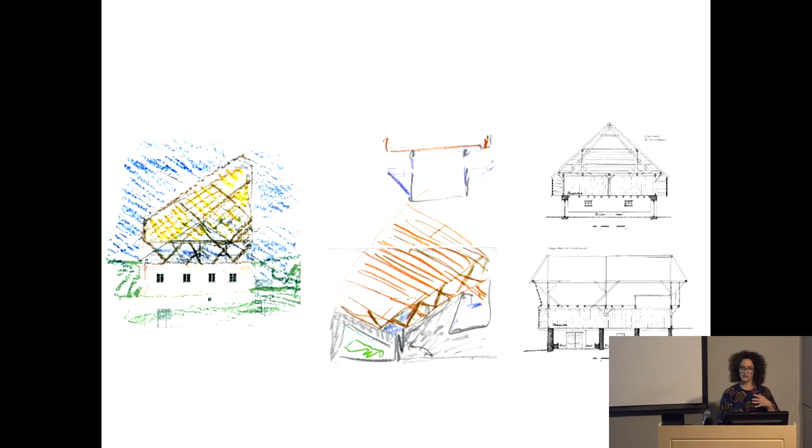We started looking at the vernacular architecture. The vernacular architecture has these big billowing wooden roofs, and generally rock or masonry walls. So we sketched on top of them and thought, okay, we want a timber billowing roof. At the same time, we want to create this connection to the sky through our roof, but we also want to be very grounded.

These are very naive kind of sketches, but this is how we were working, and we built this model in the first few days when we started thinking about the project. We didn't have a plan, a literal architectural plan drawing. We didn't know how the program was going to come together, and sometimes I think this is really helpful for us. You jump into a part of your project and go, that's the building, that's what it's going to be like, but you actually don't have anything resolved whatsoever.

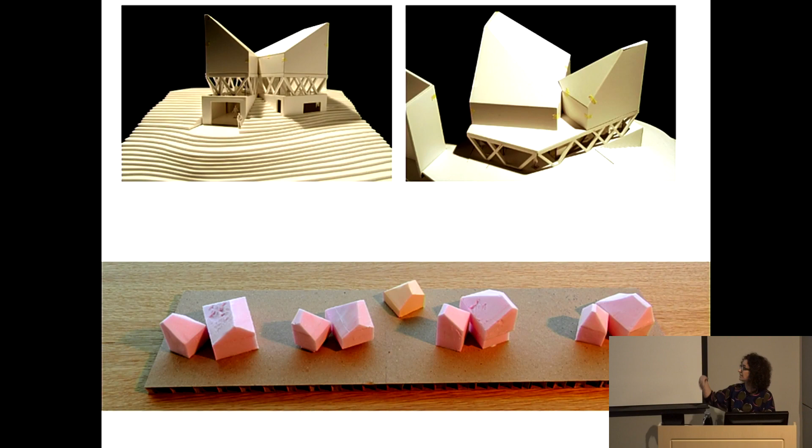And so from there we started working. We work a lot in little models that are just about form making and trying to figure out how these two volumes come together. It's made out of insulation, and you just cut it with a knife and a cutter, and it's really fast. You can make these models in 5 minutes, and then you move on to a larger scale and you mock it up, and then you come up with how this can become a kind of architecture.

So you don't only have your architecture, but you have these mountains. When you're in South Tyrol, you have these mountains, they don't ever leave you. There's a huge presence. So when you're working on a small project, how is it that you're able to be in dialogue with this incredible landscape around you, but at the same time, you're just building a house.

There's this domestic quality to it, and this is something we're often interested in. There's the hillside and then the valley side, and there's always these two different relationships to your topography that create two different scales just because of their relationship to the topography. So you have the smaller scale, and then the bigger scale just because of the topography change. Here you see the house, which is dealing with this idea of the plinth, the datum, the connection to the ground.

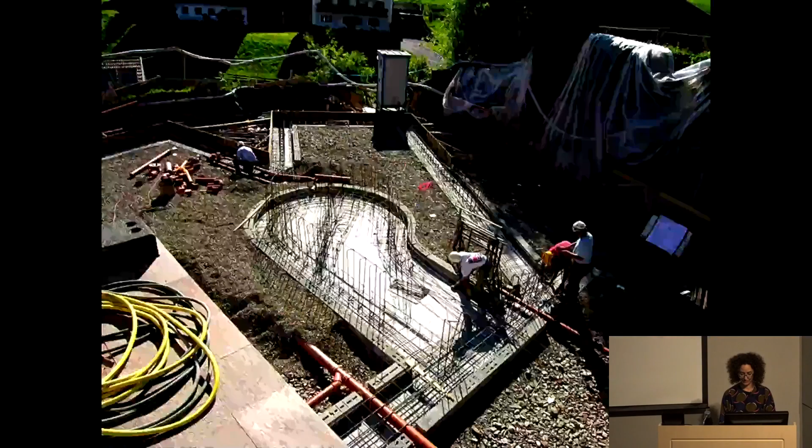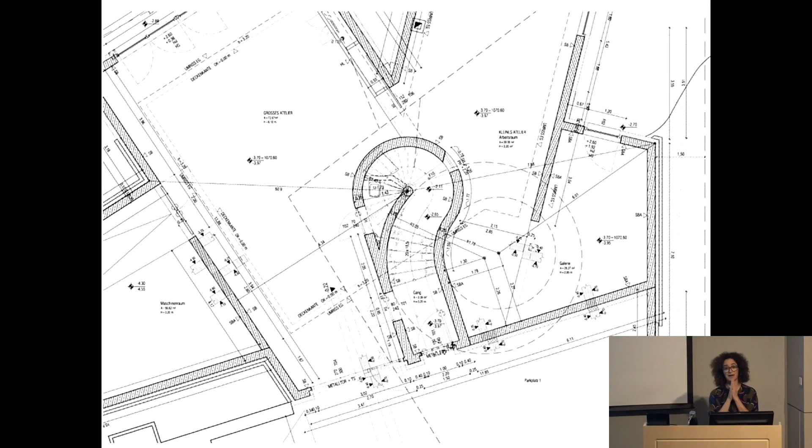We were looking a lot at Kahn's Fisher House, just to see some of that resolution in plan. I'm a plan drawer.

I love drawing plans. So here you see how you come down the ramp. This is the existing house, and you have this stair in the center, and just these two open studio spaces. There's a wood shop, and then there's a mock-up gallery space. And you go up, and the footprint is much smaller.

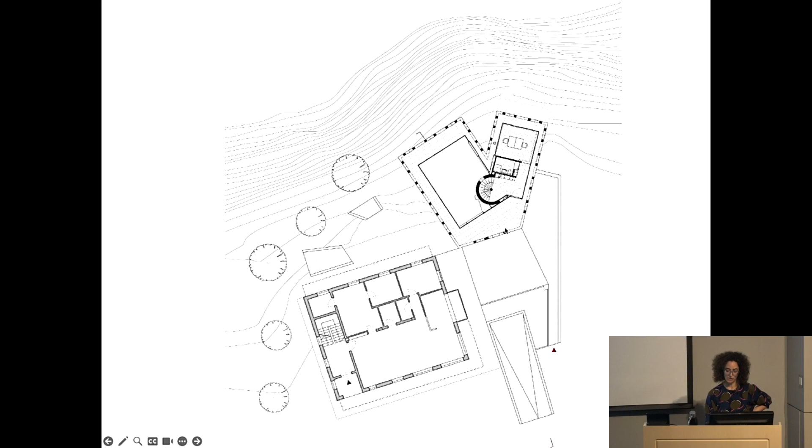When you enter into the house, there's a kind of portico, and you enter into the house here. There's an office, and then you can go up or down. This is a double-height empty space.

As you go up, you end up in the stair, and this is the living level: the living room, their private master bedroom and bath, and then there's the kitchen.

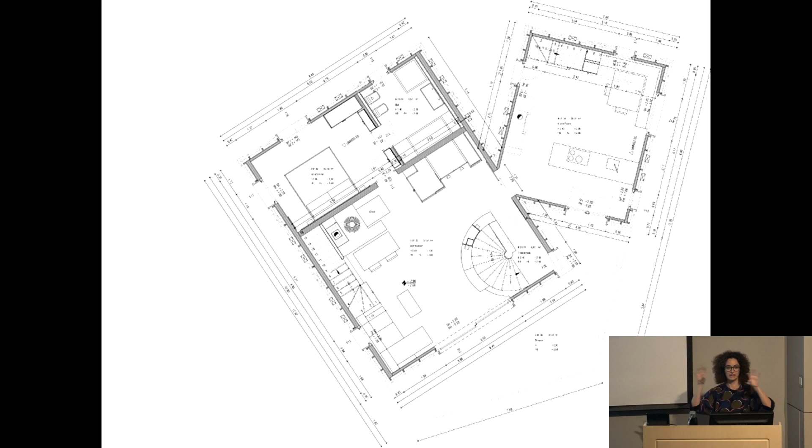What you see here, there's one stair, and then there's another stair. What's interesting about this house is it's not that big, but when you go upstairs, you can't communicate to each other because you're in two separate volumes. You have to go down the stairs to get there.

We were saying this is actually a really big topic in architecture, and it's something you can be a little playful with, gestural about what structure is, where you're not quite sure where it sits. So we had all these conversations with him about it, but structurally, this house is held up by the V timber elements.

So if you take a chainsaw around this house, it's just going to collapse. This kind of fragility of the house was something he was very anxious about, but he was also very interested in how wood can be fragile, and how it would take just a few cuts for his whole house to fall down.

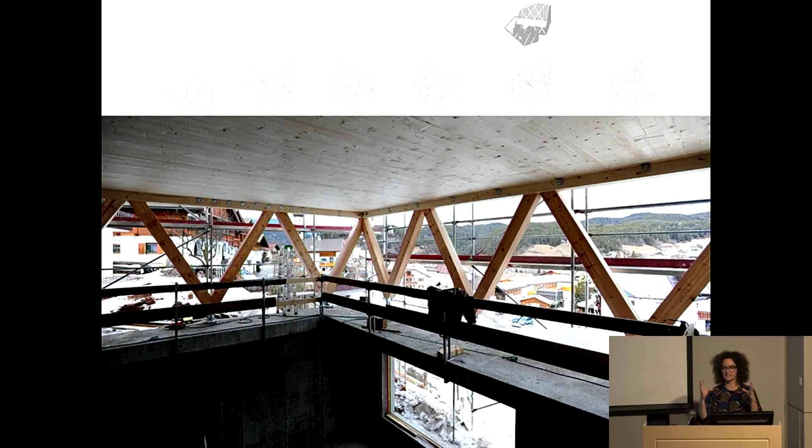And this idea of a house that you had to take care of, that had to react to these mountains around it in this kind of microclimate. We'll see a little further that this material, wood, was kind of something to be reckoned with.

So you see him here on the right. He followed obsessively the construction site. So you see the CLT, the walls coming in, the main beams, and we're going up into the bedroom now.

And you see here how we started cladding it, and the structure is pulled up into the facade, giving a kind of texture, breaking up the facade in different ways.

So these are the feet of the building. They're all pre-cut, and they have these feet that separate it from the concrete. This is a really important detail, because otherwise the water starts creeping up into the wood, and that creates all kinds of problems.

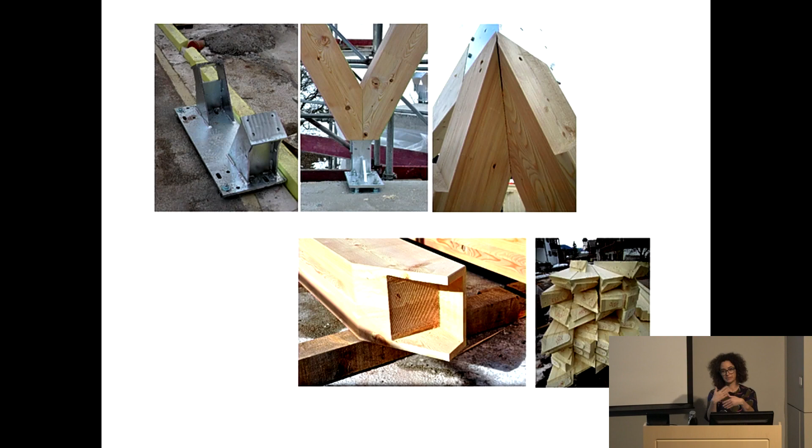And there's a problem here with this V, so water is going to collect at that point and sit there, and you don't want water to sit on wood. You always want it to be able to dry out and breathe, making sure water isn't still on it.

So we didn't think about that, but he wanted to make sure that his wood was untreated and that this building was going to get old as he got old. That was something he was very explicit about.

So a lot of these images you see are from when it's all brand new and shiny. We'll see some images later as we go on. Here we're looking down, into that porch area.

We're looking down into his north-facing studio space. There's a kind of peristyle, a walk all the way around this house, and you can just fall off. There's no hand railing. So he had kids and he put gates up, but he didn't put a handrail all the way around this house. So the idea is this house is kind of on the edge, not quite up to code, let's say.

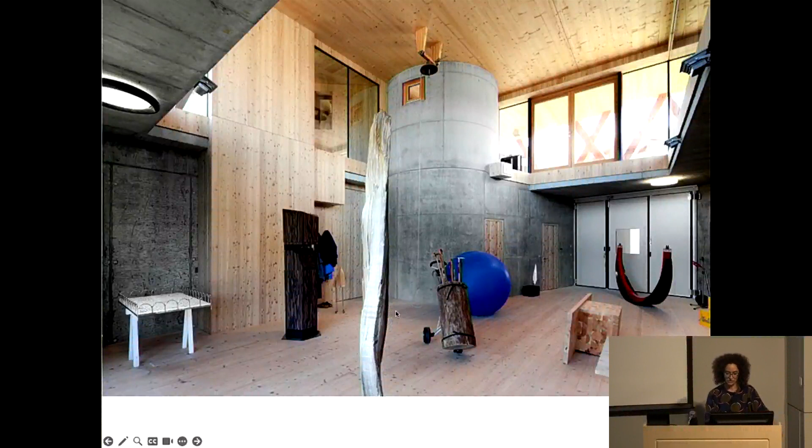There's this idea that you're at one side of the house and you look through this forest of columns to the other side, and it creates an incredible sense of openness. Your house seems much bigger because from one point you're looking through indoor, outdoor, indoor, which was something we were always talking about. You're indoor looking outdoor, you can see people walking around, and you can see into other spaces.

Here you see that central core of the concrete stair, an enveloping space, all concrete, and you come up and it's very clear: this is where the concrete stops and this is where my wooden structure begins. Everything about this house, the points where we had to have a few metal structural elements, we revealed them rather than mask them. That was really important in this discussion of where material's honesty is and what it is that they're doing.

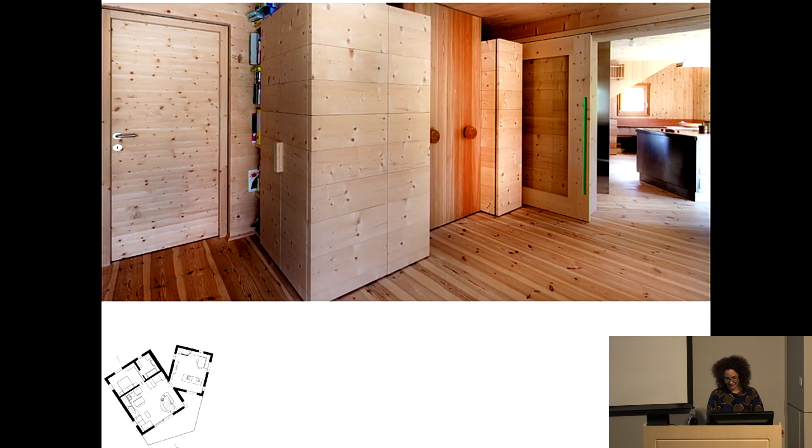All the lights are kind of etched in, the guts of the house. They have a way in which they're embedded within the wood. So really rethinking all of the electrical and mechanical systems of the house. All of the furniture, we designed all of the furniture.

It's all industry grade wood, more or less. Different ways that you look at the grain, the different textures, the handles on these furniture pieces, having kind of fun that you pull the fabric around as if it's behind these metal elements. Here were a few images of the spaces.

Then there's this one thing he drew, which is the shadow that this handrail casts on winter solstice. I thought, oh gosh, it's so poetic. And why did he do it? Because he was paranoid that his house was going to settle and move. The only way he was going to check on it is if the shadow didn't fill in the profile.

So then here we're up into the bedroom. You're on one side or the other, and they're not communicating. You'd be in this space here or on the other side, and you're in two separate volumes. He even tattooed the plan on the facade.

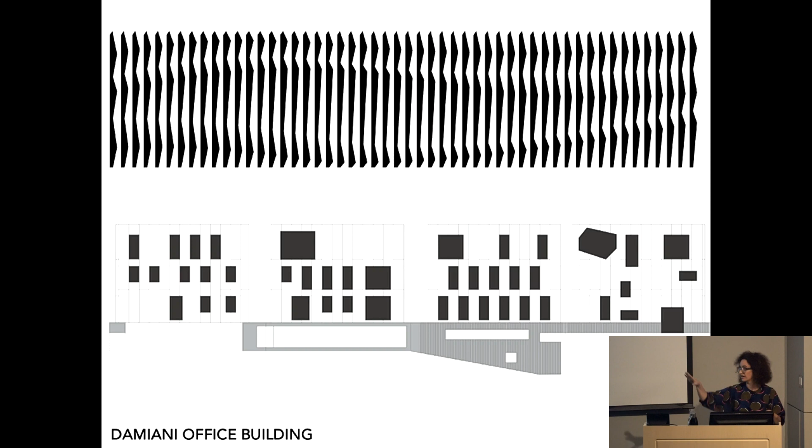And then at the top you're going to get to the showroom. In that showroom, we're going to put the sandwich in plexi, and you're going to see the stratification of the different kinds of wood, vertical and horizontal systems. So we thought, okay, that's interesting. What would happen if the facade rethinks the way you can think of a wood building, working with these singular elements - this is the unfolded facade, and then on top are these kind of brise-soleil elements. This house is located in Bressanone, in the light industrial area.

It's smack in the middle here, kind of a really ugly context along the river. And we said, okay, let's work with a wooden cube that has a kind of bark to it, like tree bark, with a kind of thickness to it. That thickness was just as irregular and rough - a lot of times when we were starting out working with wood, the buildings tended to have a kind of flatness to it, and so we're trying to push back on that flatness of wood.

And working with something along the street facade that was kind of enigmatic. It was like this wooden box that sat in among the stockpile yard of all the wood. And of course, you have that base in concrete, because wood doesn't like to touch the ground. It's a real problem, a very difficult kind of detail to resolve.

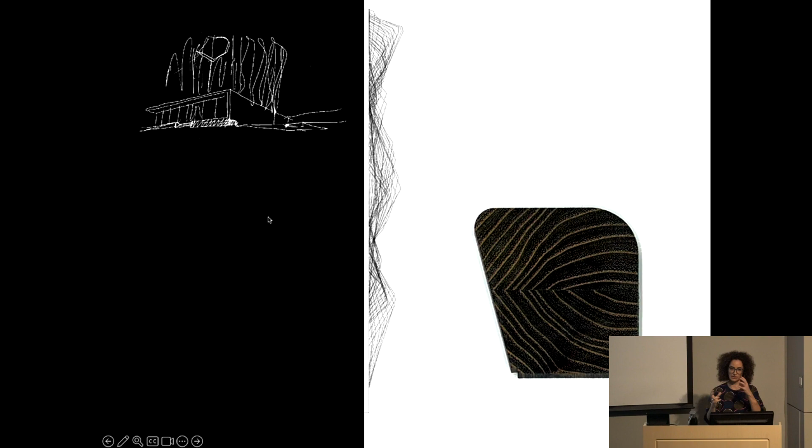So we were thinking, yeah, we want to work with this facade that kind of expresses the veins of wood, the kind of life that's ingrained within it. And this is just a cutoff of one of the handrails that we were working on. So we're kind of working back and forth in scales.

We were thinking about how we could have this facade that was closed. Everybody's working on their computers in there, so there's a light issue. So we said, okay, we'll actually have the windows behind these slats of wood and have just very few openings. Depending on where you are, these openings can reveal themselves when you're looking at it frontally, and the wood has a kind of draping effect.

So wood is incredibly malleable. You can do so many different things with it. How can it be solid and have that kind of stereometric quality to it, but also have this draping quality? In terms of its construction, there's a concrete base.

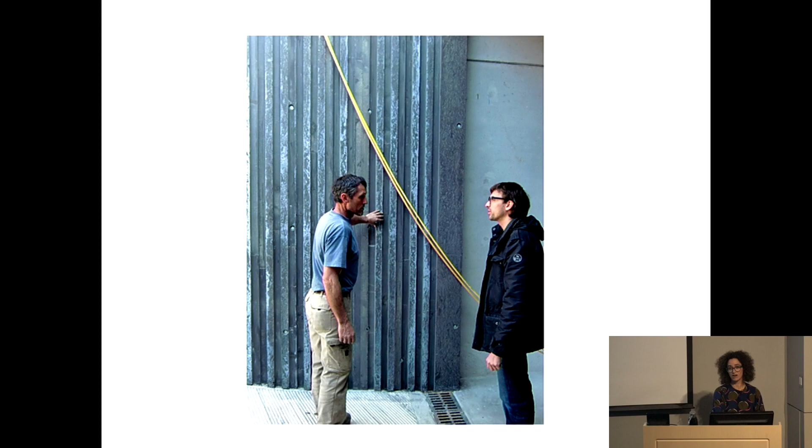We worked with all kinds - concrete can't live without wood. They're two materials, they need each other, and that's actually very beautiful. How can you work with this concrete, give it a kind of memory of its formwork, and come up with all the different ways wood plays a role in the making of concrete? That was also part of what we were looking to do, and that relationship between the wooden slats and the texture of the concrete could work with those two materials together in a very explicit way.

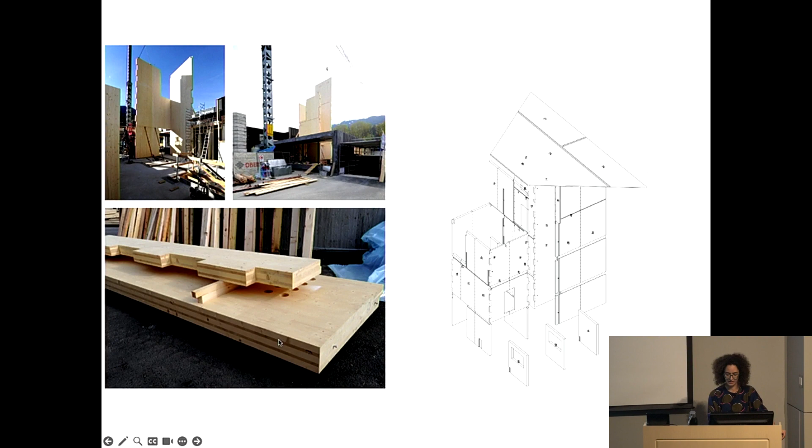The building has two structural cores. One is in the center, the stair and elevator core, and it's CLT, and that came up first. I'm just going to run through a series of images where you see the concrete base, and then the building starts to grow - the structural cores go in first, and then the walls go up: walls, slab, wall, slab, wall, slab.

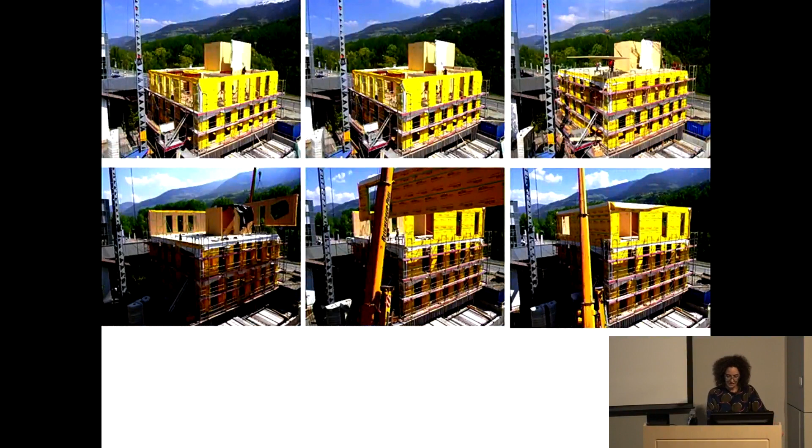And so these aren't beautiful images - these are just from the construction site camera on the crane. You get to see the box building. It's a very generic kind of building. And then they come - the LVL slats.

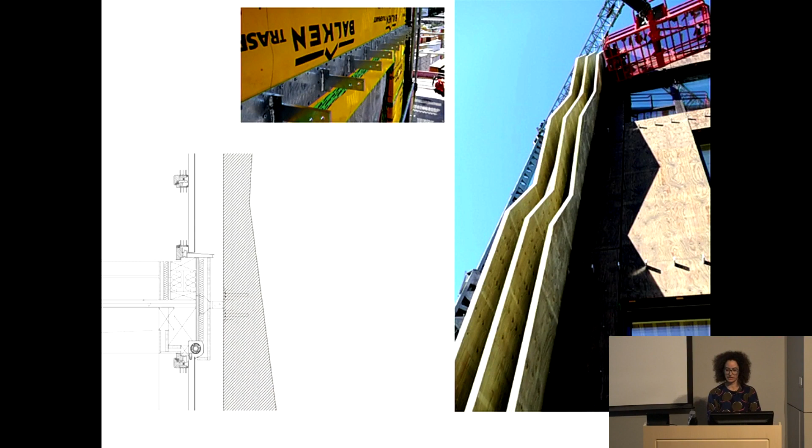I don't know what you'd call them, but they come already with their fasteners. These fasteners have a really simple connection that's already on the facade, so you could mount them really quickly. You see here in this section, this is concrete, and then the concrete stops here. There's a grade change, so you can enter into the concrete base.

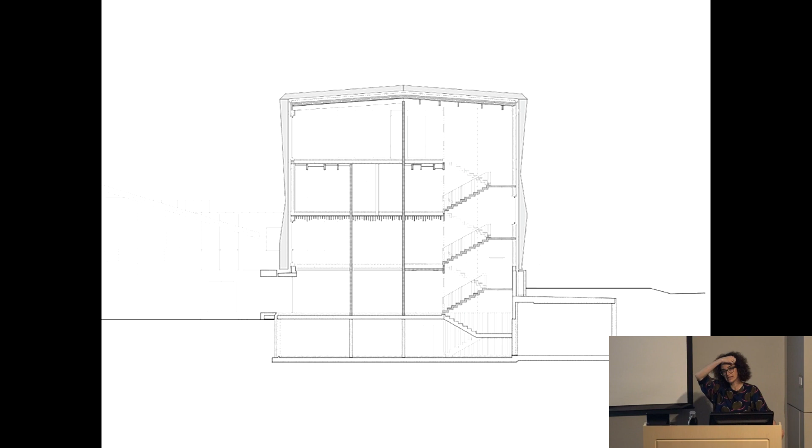And you see that in one of those first images - it's the lower concrete base, and then you're in this world of wood. Each horizontal slab is a different construction system. We won the competition because we said your whole project is a showroom. As you take your customers, your suppliers through the building, you're seeing all the different ways in which wood can become structural or non-structural systems, showing off the versatility of the material.

The wood - this is just a really cheap grade wood that, if you sandblast it, the grain really comes out and gives you this beautiful texture. That was actually a close-up of this wall back here. So as you enter the building, it's not just concrete versus wood, but there's a kind of symbiotic relationship between them.

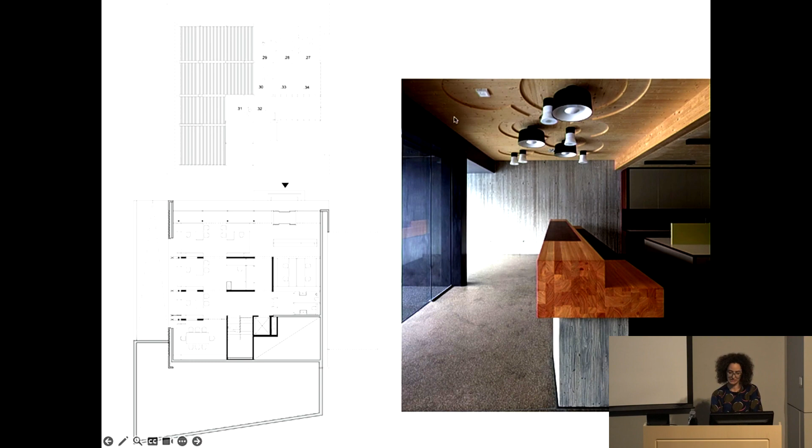So I'm just going to go through a series of images that give you an idea of the different kind of roofscapes we were giving. The amazing thing about this was that they had the production facility next door. They were the gurus on wood, so we didn't know how any of this worked, and they would come up with, say, okay, let's just make our slab. This is them making their slab one by one, just nailing them together, and so then we could test out how to integrate the lighting.

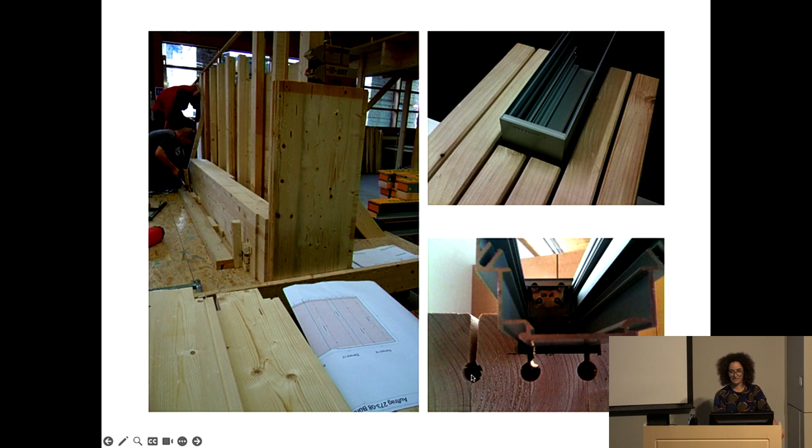And really looking up close, these are acoustic little pockets that give an acoustic property to this floor slab. Again, working with this undulating profile, what's the minimum and maximum profile height of these structural elements, so that it also talks about the structural properties of the wood.

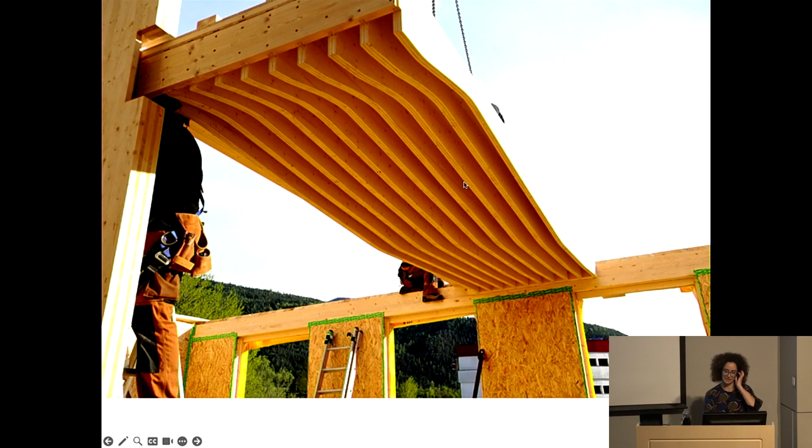So here they're making them so that they're kind of prefabricated, so when they mount them, they're ready to go. So they mount them. This is the size of the piece that's going in, and then this is the effect that happens.

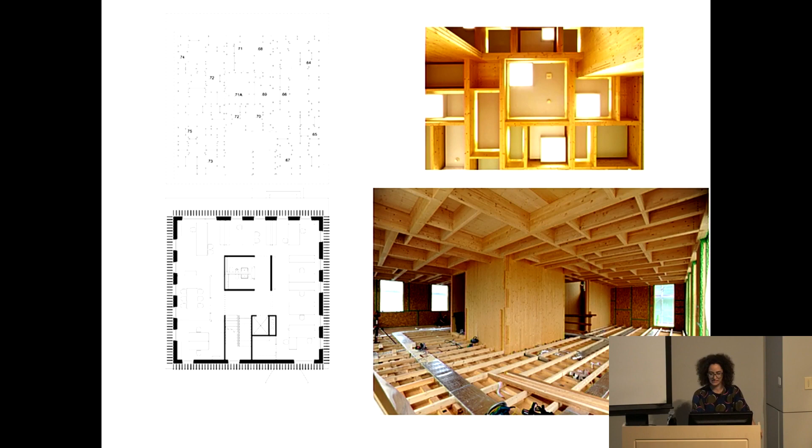So here, I always wanted—at UVA there's a coffered ceiling, and I was like, I want to do a coffered ceiling. These are some of the drawings, and all of the beams that you see here are structural. So it's a coffered ceiling in wood, and all of the mechanical and electrical systems are integrated into that.

And so you see here, this is the lighting, and they have these acoustic panels, and around the acoustic panels is where the air is brought up. So it's all kind of hidden within the logic of the ceiling.

We've gotten to the last floor, which was technically supposed to be the showroom. And so this space all of a sudden became open to possibilities. And this is a space now that's become an art venue.

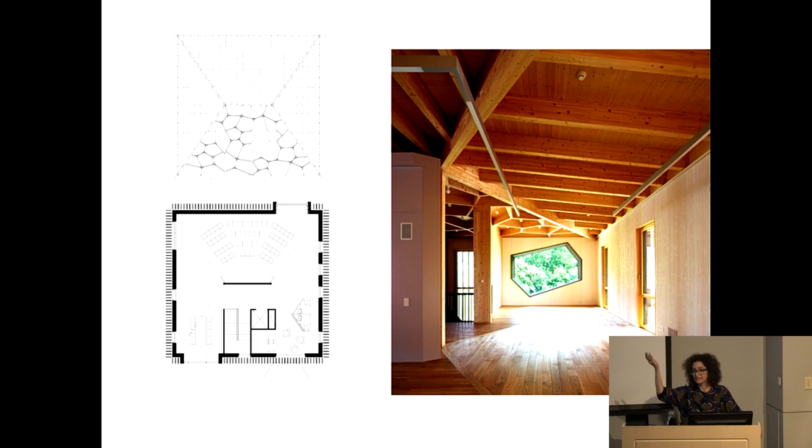They have seminars for people interested in working with wood, but it's actually kind of become a place on the radar for all kinds of cultural activities, so that you have this kind of empty space that is no longer dedicated only to the showroom.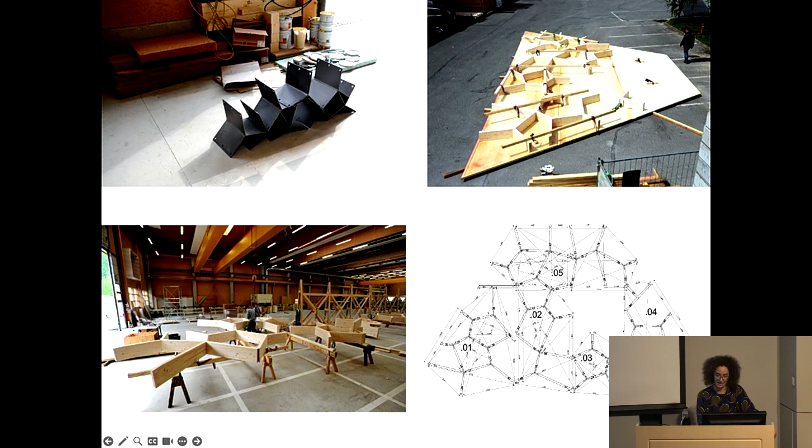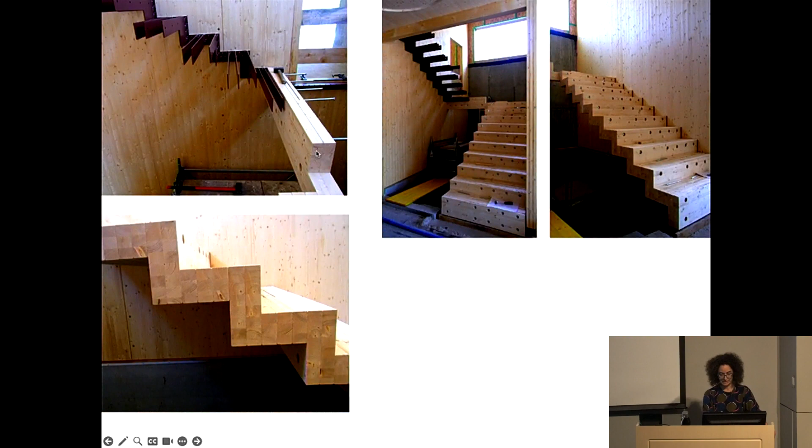This is looking up through the structural core of the stair, and you start to see how the stair was constructed. It's just a series of beams that are cantilevered off of the side of the structural walls with these mechanical fasteners.

But in the end, it's still just part of the stockyard. And this is something that the client to this day really values. People always say, 'Oh, we'll just go to the wood box,' and everybody knows it's the Damiani building—the wood building. So that's how the wood can actually communicate, and if you're working with a material, it can also be a message about what it's containing within it.

In this next project, this is a recent project that we finished. We hadn't used wood in a long time—there's been kind of a roller coaster ride in the use of wood. This is a hotel, in the UNESCO World Heritage Site. This is the first time, and probably the last time, we're going to do a hotel.

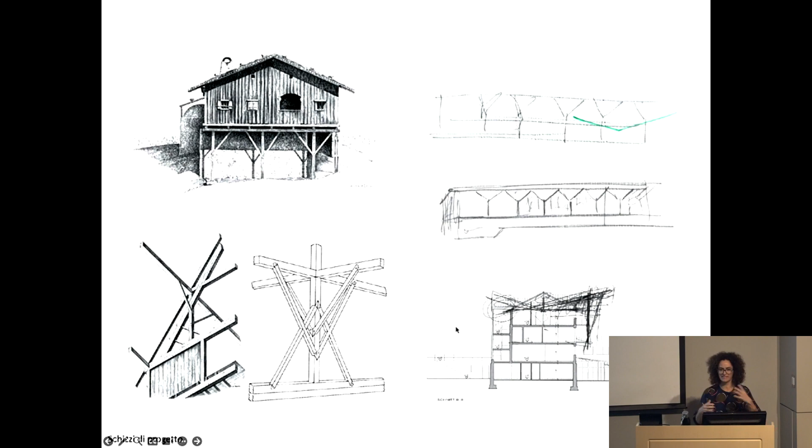In this rough drawing, green is existing concrete, yellow was the existing roof, and this is the new wooden one. All we did was put a new roof on it and make it into an asymmetrical configuration with these big columns holding it all together.

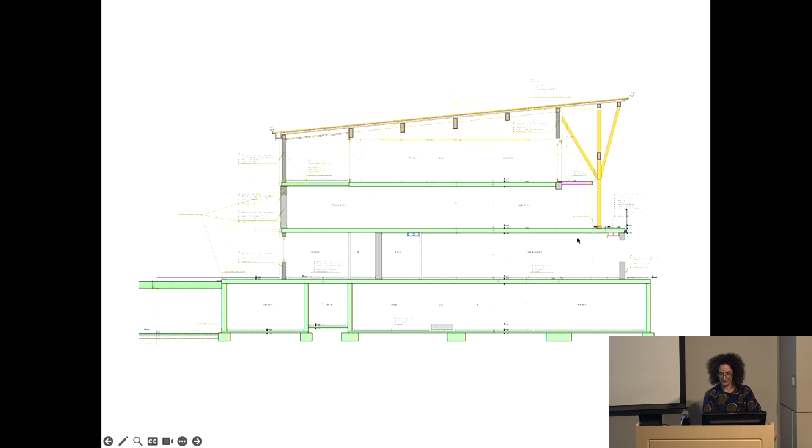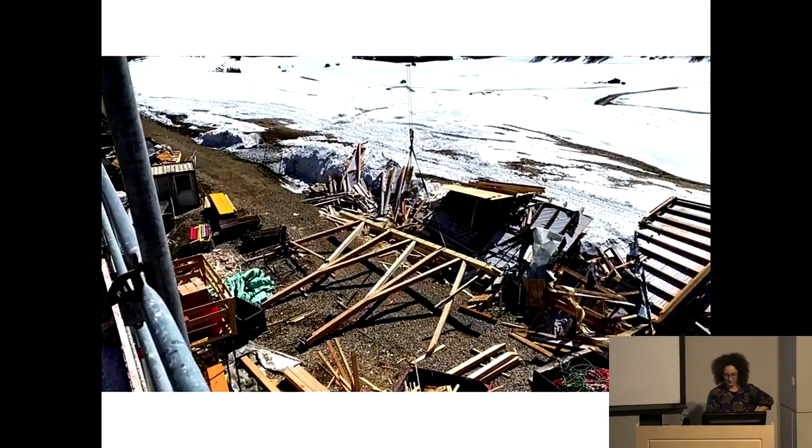This is a shop drawing of the roof, and here you see the construction site. I thought it would be interesting to show how they assembled the columns on the ground, then lifted them up and pulled them over into place.

Extremely windy—you can hear it. That's the view. They keep going, and then they're landing.

This happened smack in the middle of COVID, and there was a real problem with the supply of materials. We had all these ideas before about what kind of facade we'd have—we wanted it thick, with a real wood presence, trying to avoid that kind of flatness.

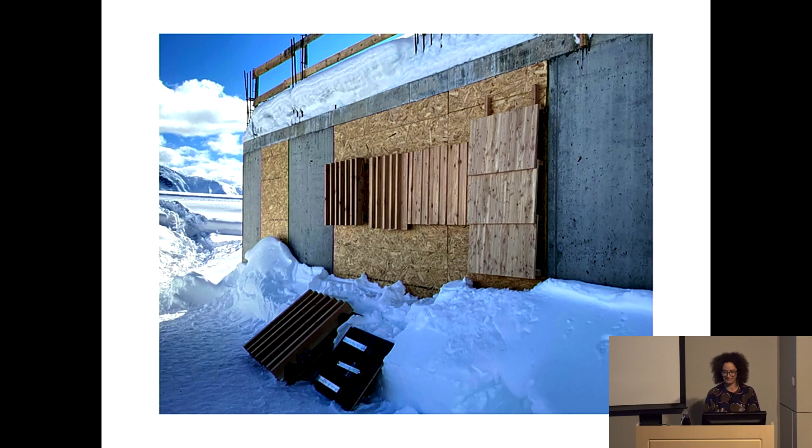All we had were planks, and they said, we've got planks, that's what we've got, you can't really work outside of that. So we said, in section this is just a wooden plank—what if it had teeth? Is there some way, with the material we have, to give it teeth, and that would give it a kind of thickness?

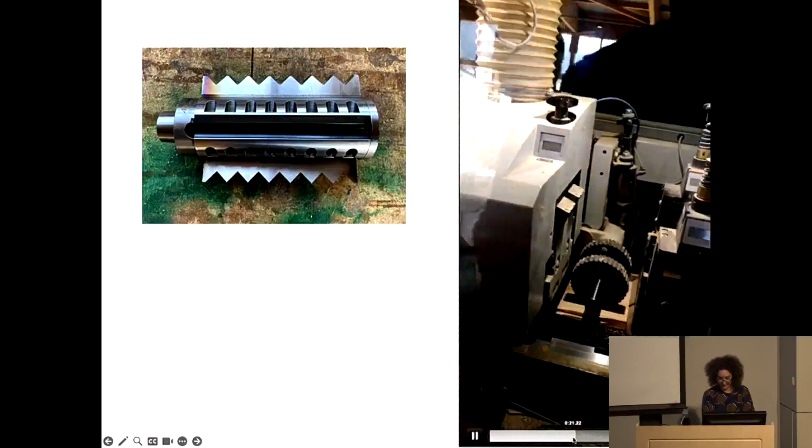So we worked with the carpenters and they said, okay, I think we can do that. They fabricated this piece and said we can saw that. They would take the boards and rig it up—it's not the greatest video, it's the only one I have.

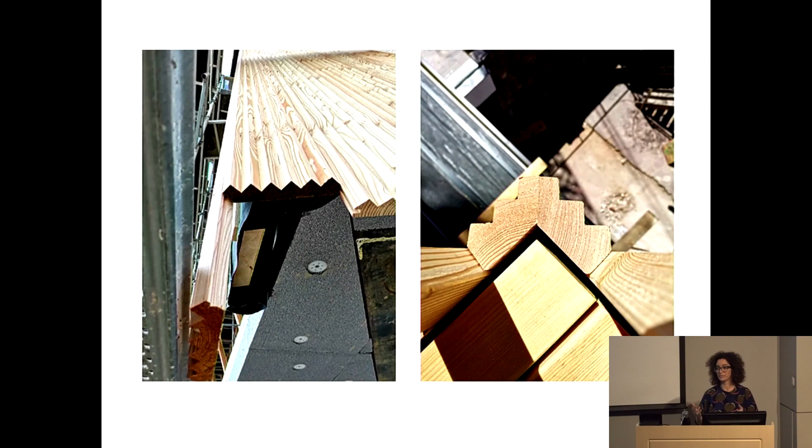That created this really beautiful surface that hid the fact that these are just boards, one next to the other. It creates a whole world of problems—like how do you turn the corner, which is what you see here, and how do you allow for windows. You start to striate and subtract some of those teeth, and it creates this very particular frame that you look out through into this jagged landscape. It becomes your railing—it became almost obsessive detailing.

Then it became an idea for the interiors, and it turned into this acoustic ceiling over the water in the swimming pool area.

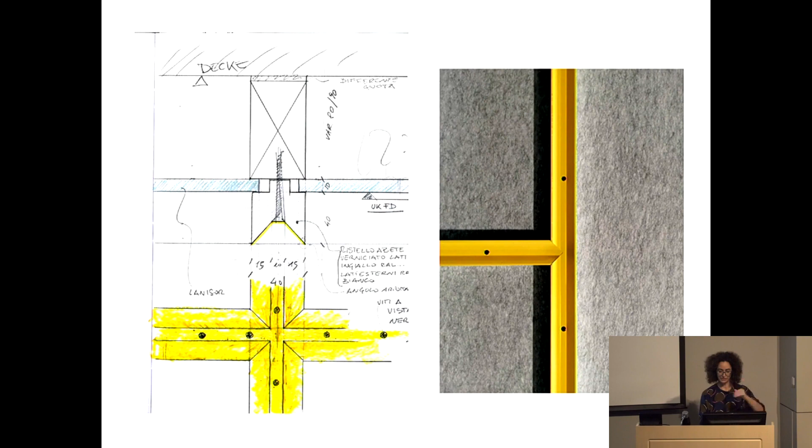It became this series of cornices. The wax in the concrete wall is Hubert's installation—you met Hubert before. We said, okay, let's work with these wood elements. They poured this concrete wall, and it was supposed to be built much better, so we said, let's camouflage it with this series of frames around it. Then we inverted it, and it became a way to hold the acoustic panels of the ceiling plane, the drop ceiling plane. It had a really low ceiling in this hotel, so we said, okay, we're going to revisit.

There's this thing traditional in the farmhouses, called the stube, where you have your fireplace and gather, and they have these wood-paneled ceilings. So we revisited that, or even the way the curtains were held behind. It became this detail that, from the facade, put together all the materials within the hotel. It's very colorful, joyful—I like color. So from there, we were working.

What time is that? It's 6:30. When did I start? An hour left—okay, we're good.

So fast forward 10 years, there's this architect who passed away in 2010. We call him our little Le Corbusier, our little Corb. He left behind this incredible patrimony of buildings in South Tyrol. He's not known, he's just extremely local, but he's a treasure trove for us.

There were two competitions held. This is Bressanone, the historical city center. This is the Bishop's Palace, the Bishop's Garden. Our office is just off here, and I live here.

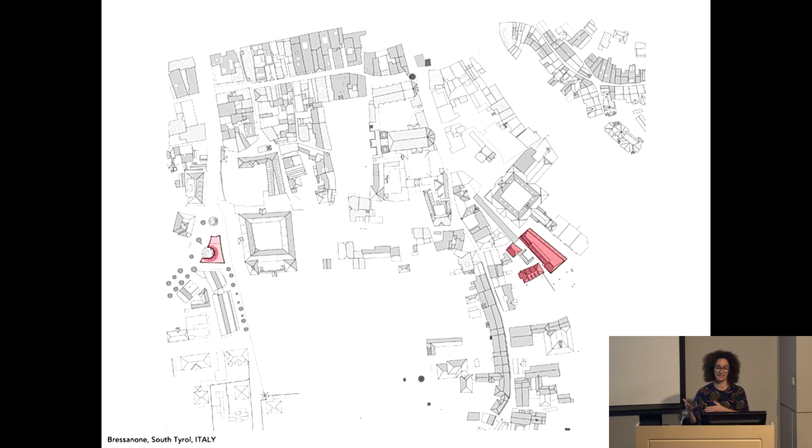So there were these two competitions: one was to demolish one of his buildings, a tourist information center, and the other, considered his opus magnum, his masterpiece, was to renovate it and bring it up to code. So on one hand, front headlines of the newspaper read 'ModusArchitects is demolishing Othmar Barth,' and on the other hand, we were in a completely different position, trying to elevate his work. Of course, as architects, it's a competition—if you win, you're the villain when you're demolishing his work. So this is Othmar Barth.

These competitions were going on at the same time. The interesting thing with the Visitor Information Center is it's a building on a sliver of a site. At its point, there has always been a series of pavilions to welcome visitors—through the ages, the Habsburg age, the fascist period, and then this Othmar Barth building. It looks really terrible here, it kind of was a terrible building, and each one replaced the other. So there's this idea that depending on where you are in history, what is this small pavilion going to be for those greeting and arriving in Bressanone, and what message do you want to send?

So we studied his project, where it was sited—these two roads come together, and then you go straight into the historical city center. What's interesting, you don't see it well, but there are these trees on the site. Here he had it drawn—you can see it a little better here. And he had his pavilion at the point of this site.

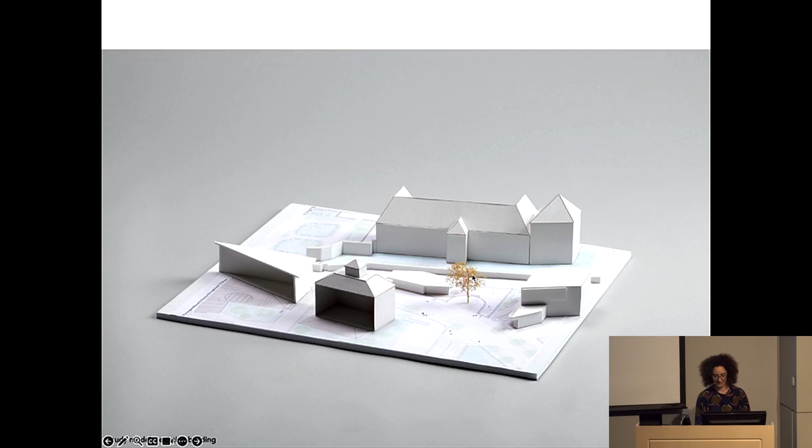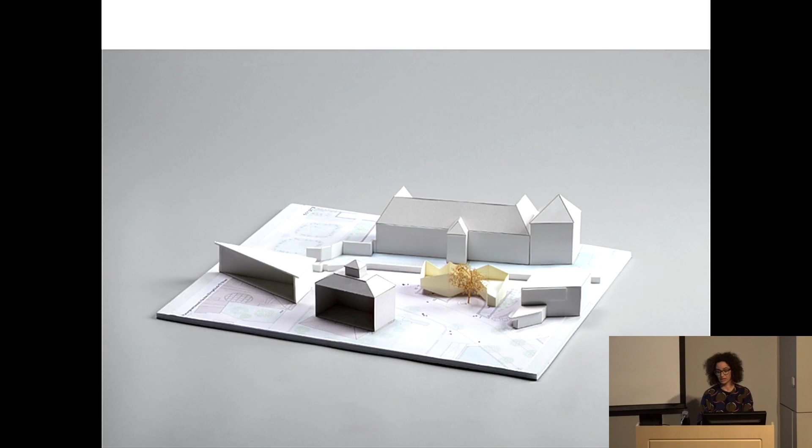So we said, okay, let's model this really quickly. Behind you have the Bishop's Palace, one of the landmark buildings of our little town of Bressanone. We said, actually the thing that's been there the longest—one of the elements—is the tree, or two trees in particular, which have a kind of historical resonance. There's something about the placement of this building, very far forward, that made it a pressure point in this small town. So we said, first move, we're going to do something with the tree. These are very quick study models we make, like 5-minute study models or paper models, and we said, okay, we're going to do something with the tree.

So if you keep your eye on the tree, you see all the different forms - here it's very jagged, then it's up on legs, lots of legs moving back and forth, then it's crouching really low, then getting a little higher, starting to get its form. Then we build it at a bigger scale and study those proportions a little better. The gist is there's something about the tree, engaging it in a way that you then pull back from the tip of the site.

If you look at some historical documents of Bressanone, there's always the bishop's palace - it used to be the seat of the bishop for a number of years. So the bishop's palace is the centerpiece of a lot of engravings. And in the 1800s, there was this interest in the exotic.

They would bring these exotic elements into their garden landscaping. In this case, with the bishop's palace, they had this garden, and along the medieval walls they built two pavilions - you only see one here. One was Japanese, one was Chinese. We thought that was something very interesting about this site - why not think of it less as a building, but as a sibling to these other two pavilions that has a kind of otherness to it. Exotic isn't the right word - there's an otherness to it.

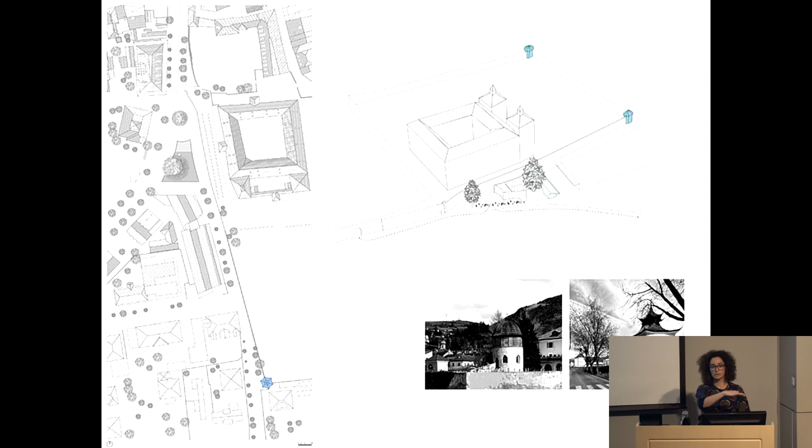If we just pull it away from the tip of the site, that creates a little mini public space. That's why we won the competition, basically - everybody else built on top of the footprint of the existing building, and all we did was pull it back and create a little mini space. So it's a very small project, but it's had a huge impact on our little town.

Here you see some images of that. We wanted to open up the groundscape so you have more of a connection as you're coming in through the main road, so you see the bishop's palace behind you. The bishop's palace is very Baroque, with all the frou-frou accoutrements and colors. So even though we're working with concrete, there's a sinuous quality meant to be in dialogue with this Baroque building behind it.

We call it the tree hugger. It's a bit of a one-liner, but it's this building that hugs the tree, opens up the ground plane, and lifts itself off the ground, trying to give space to all kinds of things that actually happen here. There's the bus stop - big tourist buses come in, and this has become their stopping point. They have festivals, using this wall, with video installations commissioned specifically for it. It's become the starting point for projects that are now important annual events for the city of Bressanone.

The plan is really very simple. This is the underground space with the roots. You enter through the covered area - there's your front desk, engagement with the tourist information people. There are some offices, and others up above. This has a geometry of some circles put together, but that geometry requires some kind of gymnastics to get the formwork going.

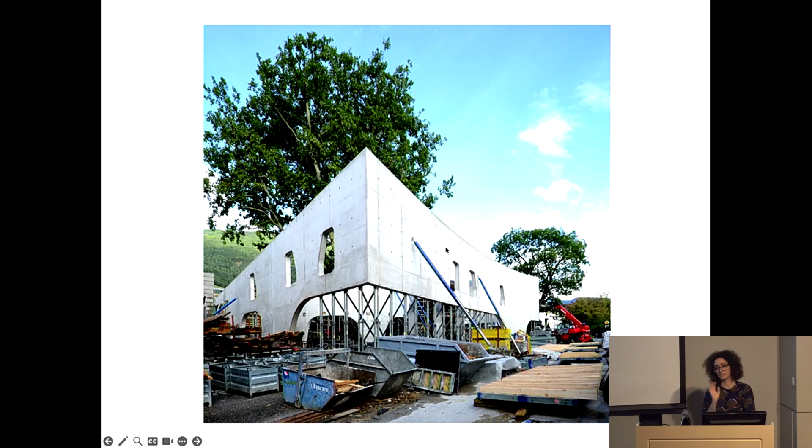This was the first time we had done an all-exposed concrete building, and we wanted to make sure you don't see the slab. Usually you build a wall, put the slab on top, then build another wall, so you always see the slab as part of the facade, and then it's usually covered over. Since we're working with exposed concrete, we wanted a continuous facade.

So we worked with a construction company that was absolutely amazing. They basically had to pour and hang these walls without the slab, so there's a lot of muscle that goes into these walls, and a lot of rebar.

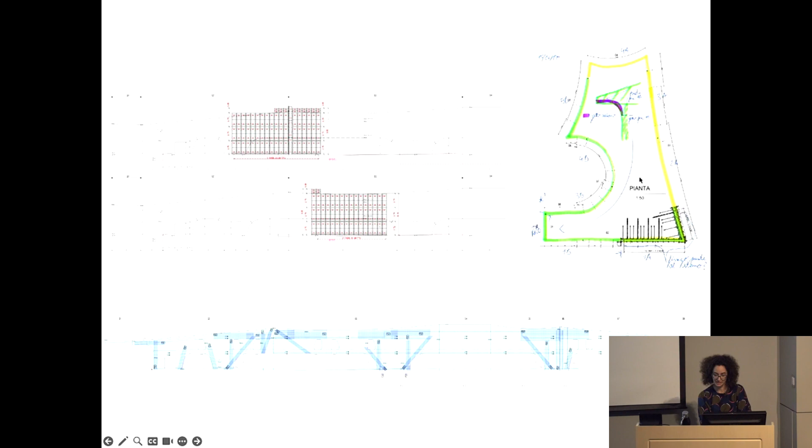This is a sketch the construction company sent us, their idea about the formwork that was going to go into this. They closed down this street, which was part of another whole conversation we had with the city, because we asked what if these don't become the main inroads - they call it a '30 zone,' 30 kilometers per hour, so you go slower and pedestrians and cars can mix more easily.

So we said, let's just close down the road and see what happens, like how do people respond to one of the main roads being closed off. There's different ways you can get into town. And then we'll use that as our way to set up our formwork.

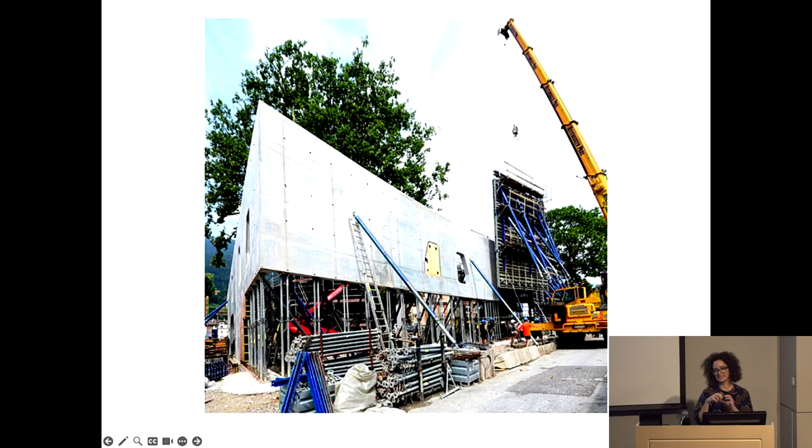Because it was kind of a problem of the construction site being right smack in the middle of town. So you see here how they're propping up the formwork, and they're taking them off, and all the windows are the same. The construction company came up with this idea of how to make these jigs so they can use always the same jig for each window.

Here you see they're not quite in sequence. Here you see how they're laying out the formwork, getting it ready. So this one's already been cast. I guess they've gone all the way around by now, and so they're holding up the walls.

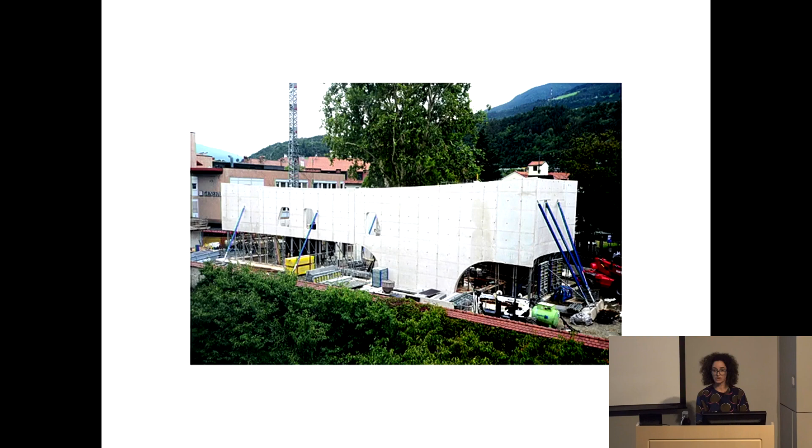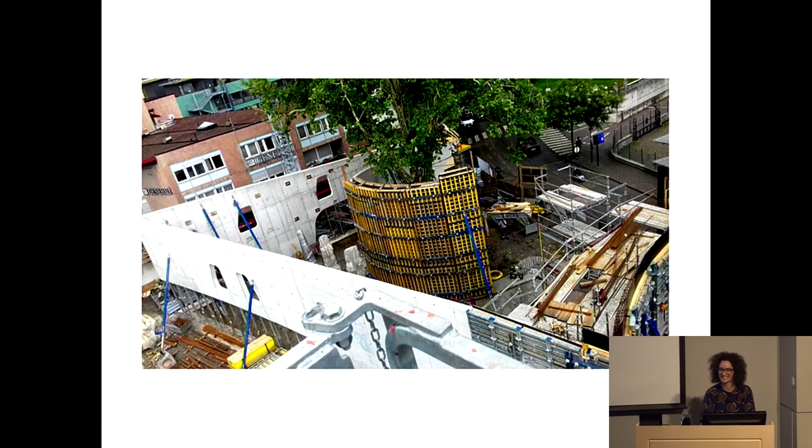There's still no floor yet, and then we had to protect the roots, and this was the most—I was terrified that we're going to build this building and then the tree dies. I was like, that would be great. We suffocated the tree. So you see some of the images of just trying to get that formwork standing up on its own. So it had to be propped up.

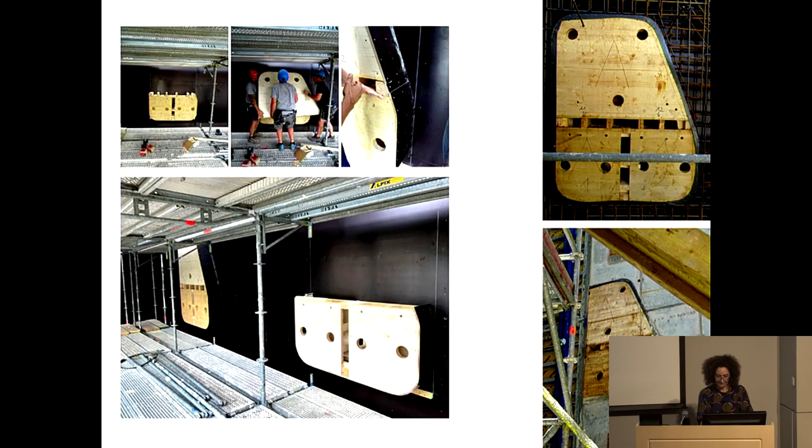And here you see the jigs that they use. So they had these two parts. They insert it, and it's notched together like this. And then they pull it apart, and they fix it. And then that becomes the formwork for the window. And that's why all the windows are exactly the same.

The floor is hung from the walls, and that's actually a very complicated detail. That's a thermal bridge. It's a structural problem—how do you get the fasteners cast in there, and then how do you reveal them and connect them up and make it in such a way that the ceiling is hung?

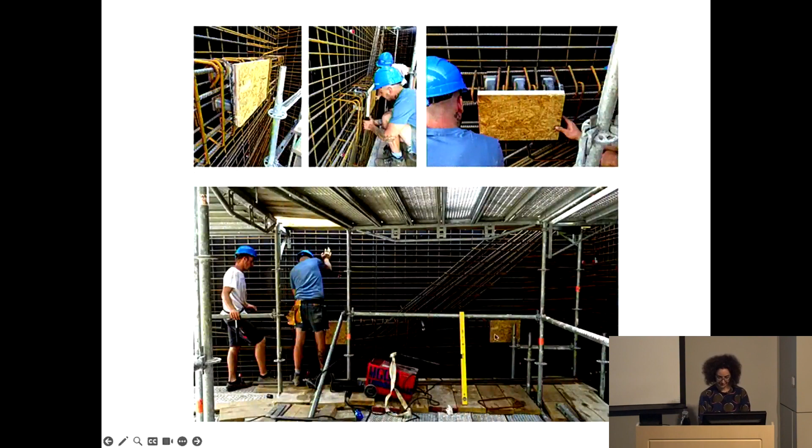So these are the fasteners that are embedded within the walls, and you can see how they're—where do you see it? Here, you see how they're putting it in the rebar, and then you see them here. Okay, the ceiling—you see them here. And then you have to uncover them, fix the other fastener, and then these are going to be held.

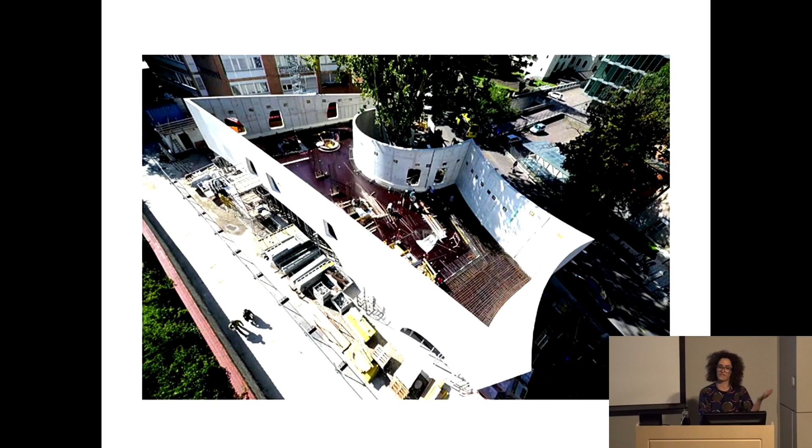This is, we're looking at the formwork that would be holding up the floor. And it's just so fascinating, it was really fascinating. So here they're working on the rebar of the floor.

And of course, with concrete—if you're Tadao Ando, you can have these beautiful polished surfaces and everything is working perfectly. But concrete, there's a recipe. We worked with the concrete company on what that recipe was. There's a huge amount of aggregate that is in excess in our area now because they're digging this massive tunnel from north to south where all the trucks are going to go. So we worked with all of this various local aggregate that's coming out of that dig.

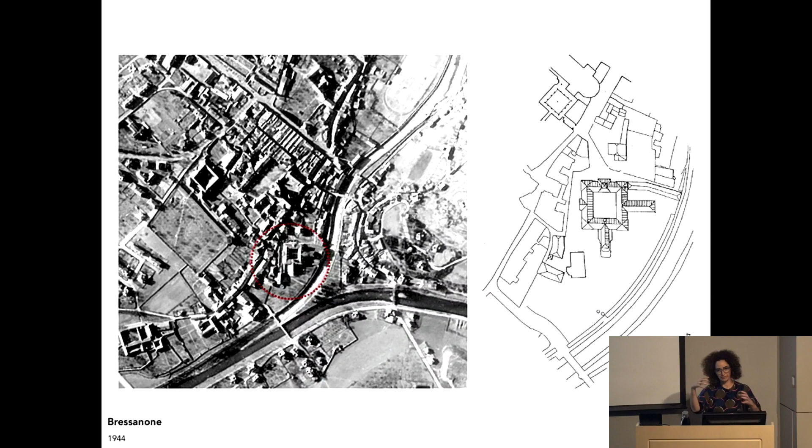It's an academy dedicated to the religious world coming in contact with the non-religious world, and they have a lot of seminars. It's a kind of lifelong learning institute.

And this building, if you see it from the outside, is bare bones. It was a total scandal when it was built because, you know, another Baroque centerpiece of the seminary building, and this was bare bones, regular brick and a concrete frame, all exposed.

What's really interesting about this building is that it's incorrigible—there's no getting out of that structural pass of the structural grid and the brick. They have a logic to it. There's a rhythm, there's a dimension, it's modular. And if you're trying to intervene in that, you really have to fall within this measure of these materials.

The two things the client asked for was, one, they wanted to create more of an access point with the community. There was this fire stair put in this kind of abandoned courtyard space between the main building and those three buildings that kind of triangulate.

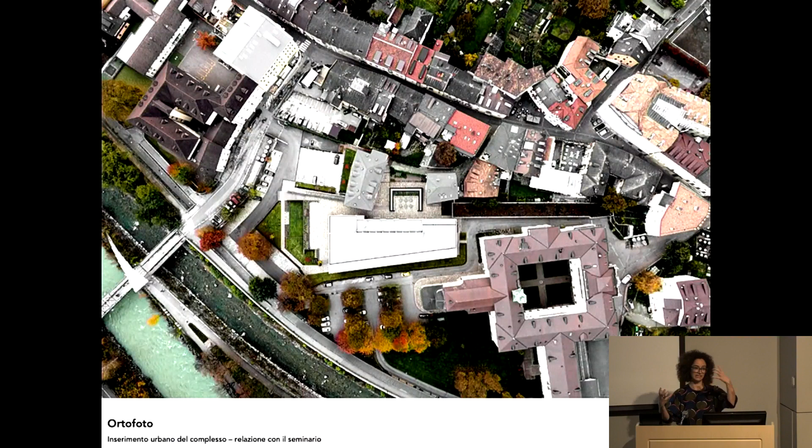And so that became a starting point of an idea. We said, this idea of continuity with the existing—a lot of times you see these beautiful projects, it's like old and new, you know, like Corten steel and stone. And we thought, what would happen if you tried to really work in a more seamless way, where you weren't sure what was existing and what was new?

And so we rethought the project, and started looking more in depth about how you could intervene within this brick and concrete framework. So I'll show you a series of drawings, not to get into the floor plan of the project, but just to give you an idea of the amount of intervention. Red is new, and black is existing.

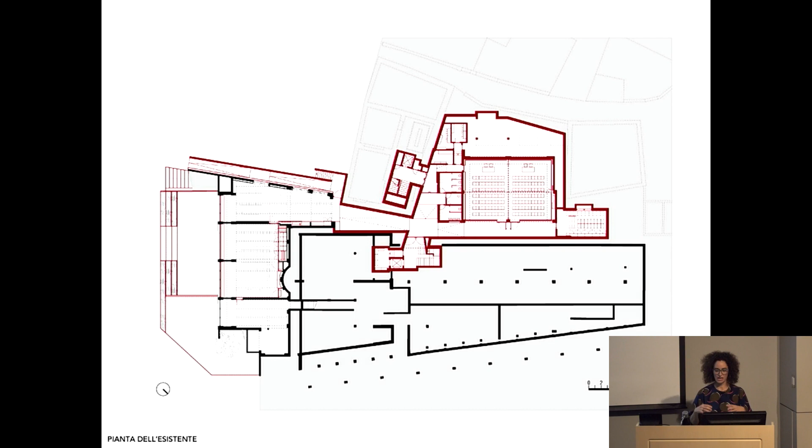So we had to intervene at the foundations of this existing building. We put in a large seminar space underneath. The axis that you saw before became an underground axis that connected to some of the existing rooms below.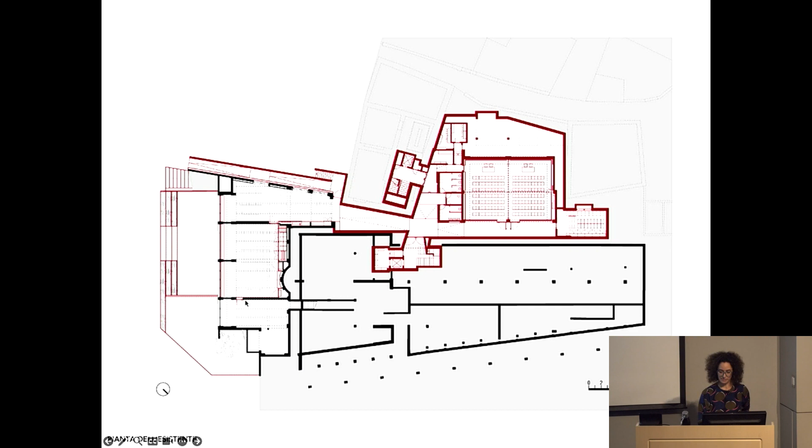In section, the project, in order not to be seen, it was really important to insert a new vertical core and connect these existing facilities with this new kind of underground bunker facility.

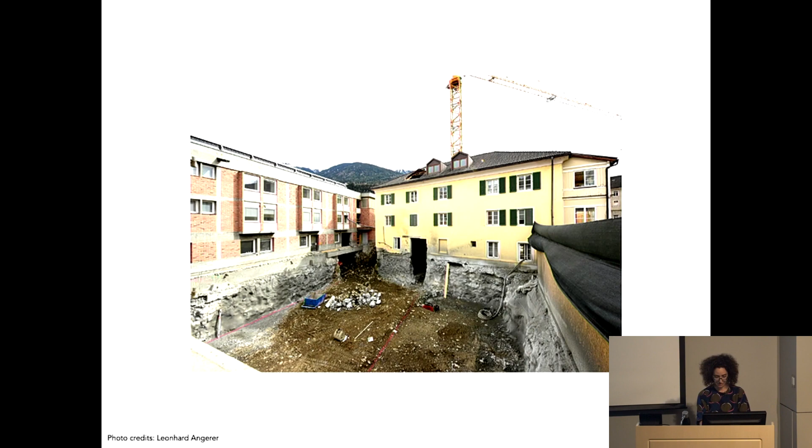So here you have some images of that site. It's very scary to excavate next to foundations, and it was something that we were there on site every day, and I was just totally worried about the building settling and so on and so forth.

Just to give you an idea of how much of this building was torn out—this is the main vertical stair. It's really hard to understand this project because it's kind of convoluted, but there's this vertical, we needed one major vertical circulation, so we gutted out this area.

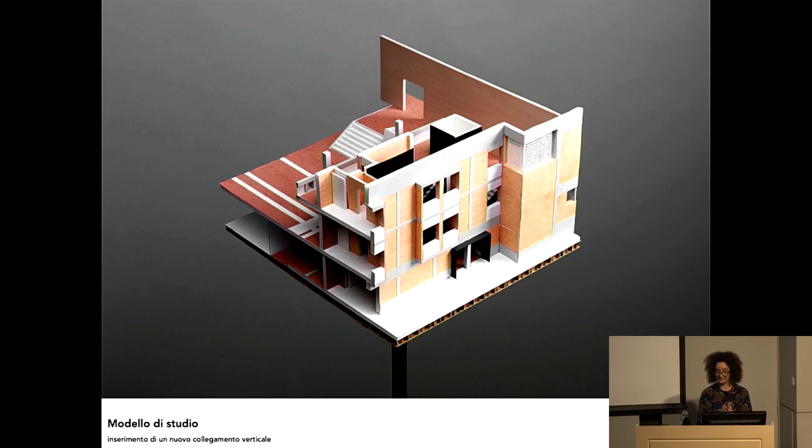And so, you know, you're changing the paths of the bricks. We mocked up this model to try and figure out how that could work in relationship to the existing facade. Here you see some images of that. And this is the passage that we made, that axis underground.

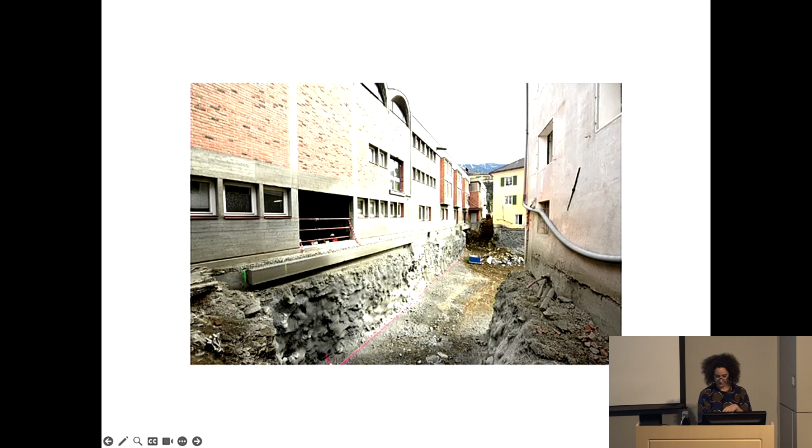You see in that section line here. So this is that underground passage that became the way which the vertical stair is, and you connect up between existing and new down below.

So these are just some of the images of those spaces that were either existing or not. There's a kind of idea of continuity of these spaces, instead of saying, oh, look, this is existing building, and here we are, us architects, this is our intervention. It was trying to really have a very organic relationship between existing and new.

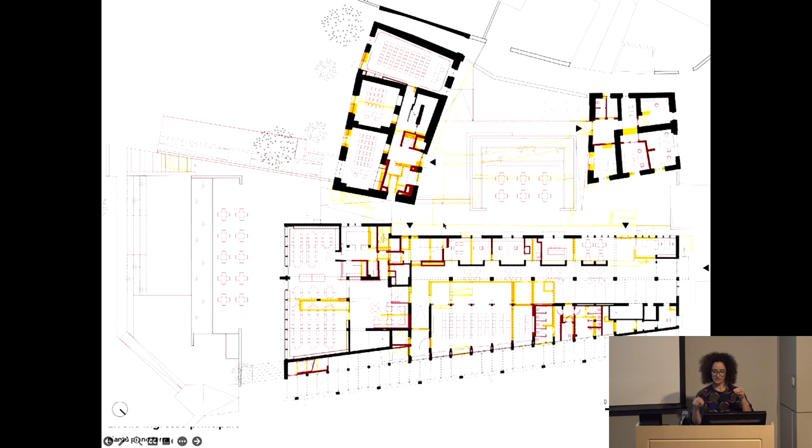Yellow is demolished and red is new. So it was very punctual, the intervention. This is an image of the existing. They wanted an urban access that connected it to the community, but they also wanted an access that made it easier to orient yourself within the building.

So then we cleared the whole thing out, and we made this much wider corridor. We opened up this throughway up to the cafeteria so that there's light at the end of this passageway. And we opened up these big window walls to let light into this modified conference room.

This is the amount that it completely had to be gutted out. And so all of the existing materials had to be inventoried, each and every stone, paver. They were numbered, taken off site, held, and then reassembled back on the site.

Why the building is so beautiful is this incredible space on the second floor. You have this piano nobile space, and it's this— Othmar Barth, he worked for a period, we found out, in Rome with the engineer Nervi. And so he had this incredible capacity to work with formwork and really bring out the plasticity of concrete in a way that it sculpts the light.

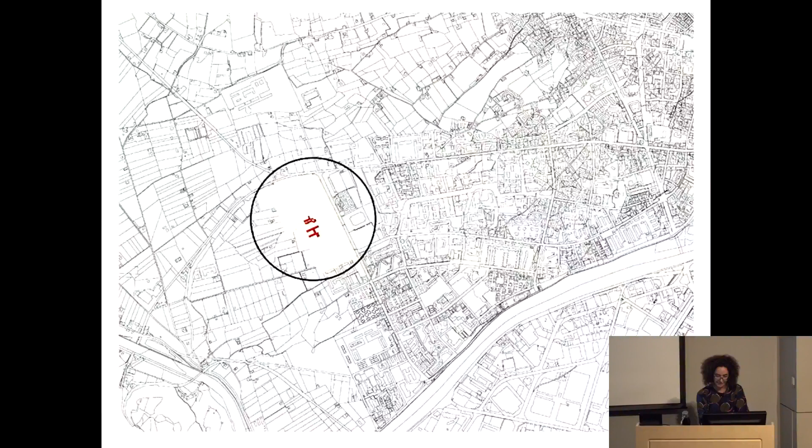As Jason mentioned, we do a lot of schools, and this is the first big competition that we won. It was a 20 million euro project, and we had never built anything in our life. You can see that there was a master plan for this school district that was going to be at the center of this expansion zone, and there's two buildings. One had a curvy footprint, and one had a rectilinear footprint—one was for ages 0 through 6, and one was elementary school. We had to keep that kind of footprint.

In terms of the elementary school, we had just been to Holland, and my brick fetish just didn't go away. I said, gosh, these bricks are beautiful, and they have this contrast working with dark bricks and these white windows. This building happened right after that trip, and I said, we've got to do a brick building.

There's something about schools—the way the codes are written, the way you're programmed to think about schools—that everything has to be standardized, and schools fit into that category of non-places. If you go to one school, all the schools are the same: there's a classroom, the chalkboard, the railings that all look the same. As time has gone on, these spaces just become more and more impoverished by the kind of materials they have to use, just like for formaldehyde emissions, there's only certain kinds of materials you can use. It's almost like a hospital.

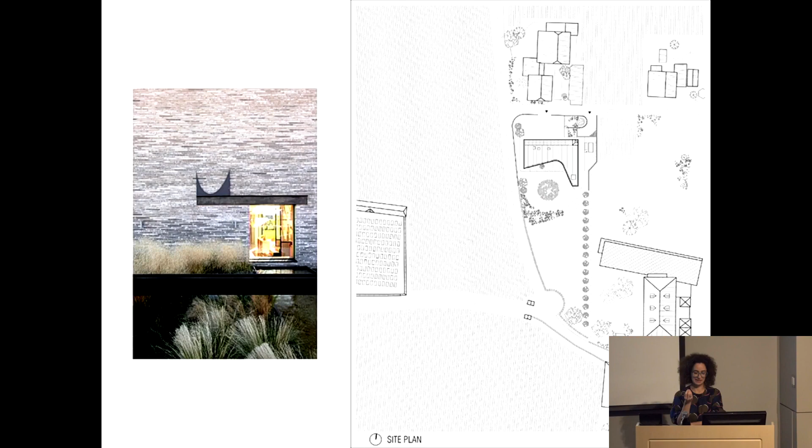And so we started thinking about a brick-faced house. Okay, it's a brick-faced house—I would like to do an all brick, this is my next project. But we were interested in how with bricks there's this idea of the ground, the sedimentation of the ground, and how that could become a kind of tectonic and aesthetic to the overall feeling of the house.

So here you see the house is located on an elongated piece of property, and we pushed it back against the northern edge to have this kind of tail of garden before it, and really anchor the house into the ground, working with a palette of bricks that was like an epic story of trying to find the right brick company, trying to find the right recipe.

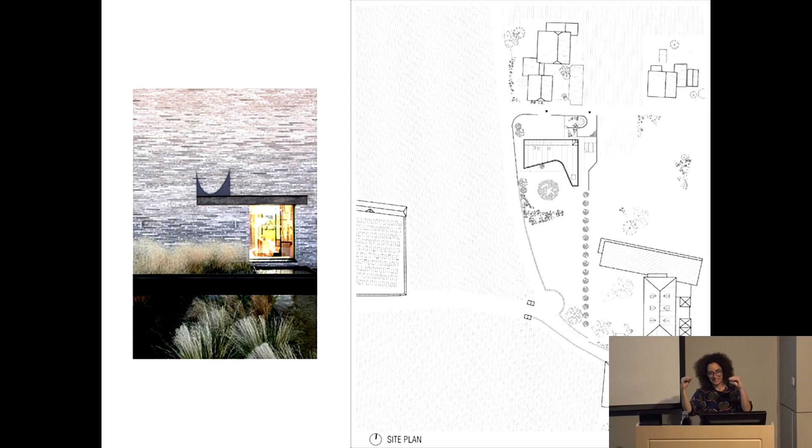How do you tell a bricklayer to say, oh, a little white here and a little brown here and a little black here? It was actually very complicated to get that kind of patina and sedimentation over time, so it didn't look like all the bricks were the same, or wasn't too designy with a patterning to it, like 'here's my dark coursing'—we wanted a kind of softening of time.

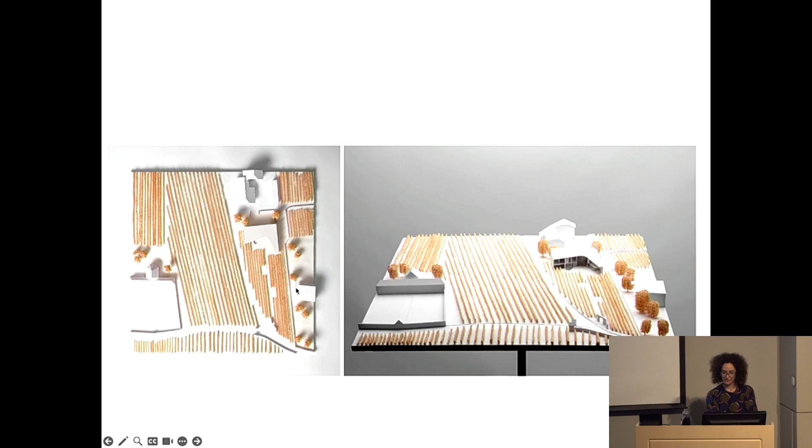Matteo and I had been to an Ellsworth Kelly exhibition that was one of those random moments in our lives that constellate an experience that changes you. We went when we were in grad school together, and we would always come back to this imperfect curve and how it creates these two figures. That became the inspiration for the formal strategy of the house that we started working with in the model even more. From that, the original Belden brick came into my mind when I was on the Muschenheim Fellowship.

We started touring brick companies in northern Italy. Brick is not a local material in South Tyrol, and it actually has some political baggage to it. When we did the school project, the province said we couldn't do a brick building because during the fascist period a lot of buildings were made of brick. Working with a material that had that baggage, they were really concerned about what message it would send. I don't know if I'd fight that battle again, it's a prickly path. But we argued there are many different kinds of bricks and materials, and many ways to cull political statements through materials—it's too convenient to just say brick equals fascist. A lot of things came out of fascism that aren't just brick architecture. So we had a long path of divorcing them of that idea, and we ended up building it anyway. That's an aside.

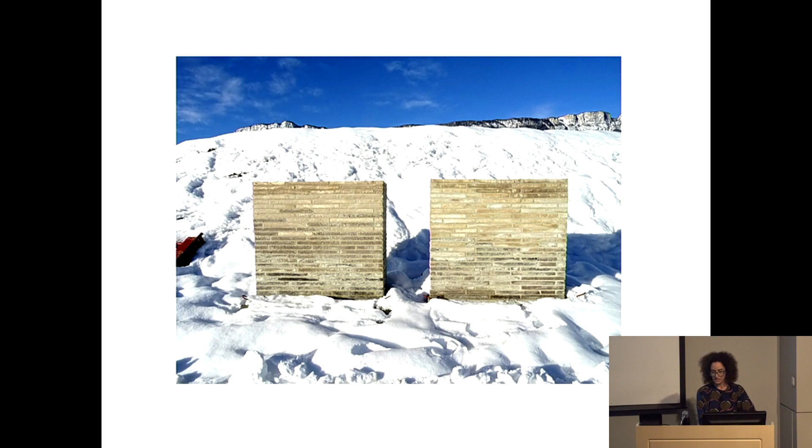So it's a house that's new, but it's going to look and feel like you've already lived in it, like part of your skin. How do you get that kind of aging? How do you design that weathering as a kind of aesthetic? Brick for us was really interesting to work with for that. Then there was the Ellsworth Kelly influence, and I still find bricks around our yard—we collected so many. We tried so many different mock-ups, working with reclaimed ceramic tiles for the roof, trying to come up with your palette.

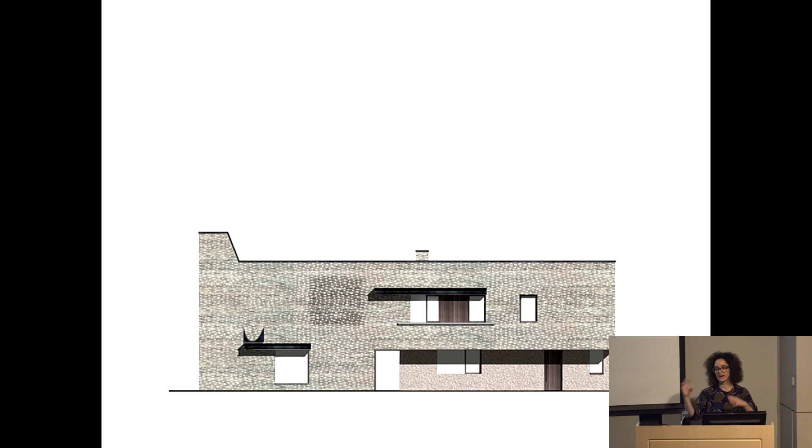This is the facade we presented to the client, and we said, this is how your building's going to look—it's going to have a kind of body to it, and we're going to work with steel profiles used structurally but also in a decorative way. After a lot of trial and error, we achieved that tautness brick can give a facade from afar, giving it a kind of weightiness, but as you get closer it's actually really irregular. There's this idea of being weighted to the ground, so darker colors move up into lighter colors—that idea carried into all the interiors we developed for the project.

This is the entryway to the house. It's acid wash metal panels, and there's some of just the regular kind of brise-soleil. It's very simple how you can open it up and make the wall become more transparent. And then when you come on the inside, it's a very joyful house.

The clients, one's a designer, one's in the shoe industry. So we wanted a house that was full of life, that you walk into this brick envelope and then you come into this world of all kinds of materials.

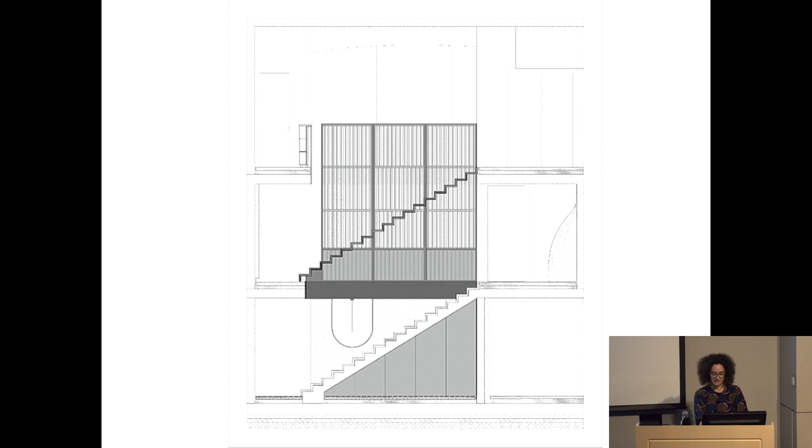One of these was this kind of centerpiece, this stair that we mocked up with a 1 to 10 scale model. I always remember that Zumthor taught a studio when I was at GSD. I didn't take it, but he said 1 to 10 is the model you need to get the right lighting and the right material quality. So I said, we need a 1 to 10 model of this stair. And so we did. We mocked it up and worked with the designer—she works also in the shoe industry, so there's lots of laces and stuff. We mocked up that stair and she helped build it, and you see some of those images here.

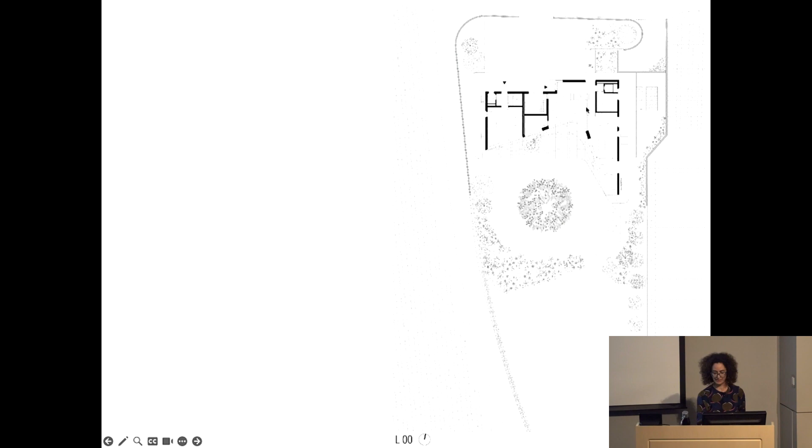So the plan—this is the underground, there's more garage than there is house—and then you come up. It's a much smaller house, and the in-laws live on this end of it. So it's actually a 2-family house, and there's a double height space at its center.